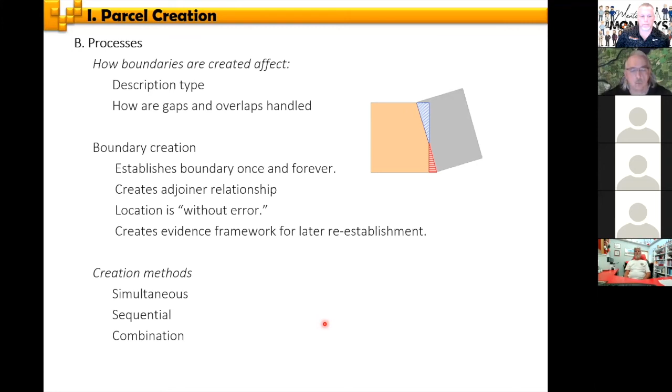Okay. Page down. The simultaneous conveyance is when the boundaries are all created at the same time by the same legal instrument. And all the boundaries that are created have equal standing with respect to each other. There's no junior and senior rights. An example of this, for those of you in public land survey states, is the creation of sections. When a township plat is recorded, accepted for recording, at that point 36 sections, or however many are within that township, are created at once, and they're all equal standing with respect to each other.

When a section is quartered, those quarters are created simultaneously by connecting opposite quarter corners. That's a simultaneous conveyance, and so on and so forth. So aliquot parts are all simultaneously created. In most states, subdivision requirements require that when the map is accepted, at that time it has to be surveyed and all the monuments have to be placed. So when it's recorded or accepted for recording, at that point all those parcels are created at the same time and are in equal standing with respect to each other.

And that's generally a lot and block type of description. So lot number 1, the Sweetwater addition. So you can see that in a simultaneous conveyance, there are no junior and senior rights between the children that are created, and the description is typically a lot and block or an aliquot part. Okay, so to a certain extent, when you look at a description, it kind of implies a type of conveyance. So if I say I've got the northeast quarter of section 16, that implies a simultaneous creation of that quarter section. Okay.

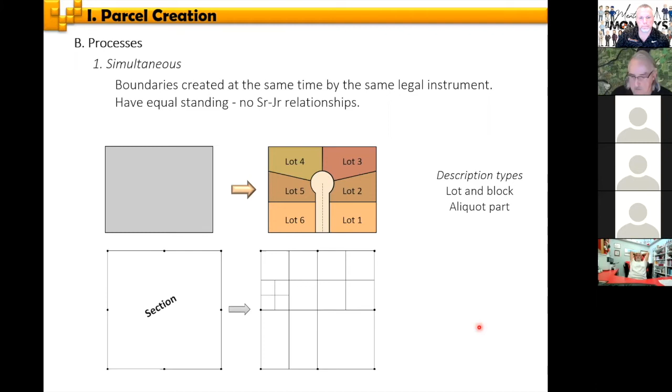Sequential is where parcels are created independently from the same parent over time. And the earlier created boundaries have higher precedence, or they're senior over later created ones. So if I've got my parent parcel here, and we create parcel 1 in 2008, then parcel 2 in 2010, and parcel 3 in 2015, there's a hierarchy or precedence of these boundaries. Parcel 1, because it's first, is senior to everything that follows it. Parcel 2 is junior to parcel 1, but it's senior to parcel 3. Okay. So we see that we've got that dependency of boundaries. So there are junior and senior rights in there.

And the typical types of descriptions that we have for sequentially created parcels are a metes description, or a bounds description, or a metes and bounds description. The difference between the two is metes means by measure. So we generally give directions and distances. Bounds means by limits, like we call for adjoiners or call for a river or call for a road. Metes and bounds combines those two together.

That's what most people are familiar with. So again, if you see a metes and bounds description, that implies that that parcel was sequentially created. Now that's not 100% true all the time, but it's the initial implication. You won't know unless you do a title search.

The last one is a combination conveyance. It's called a combination conveyance because it's a combination of sequential and simultaneous. And generally what it is, is a sequential creation of a simultaneously created parcel. So the boundaries can have characteristics of either or both. There may or may not be junior and senior rights.

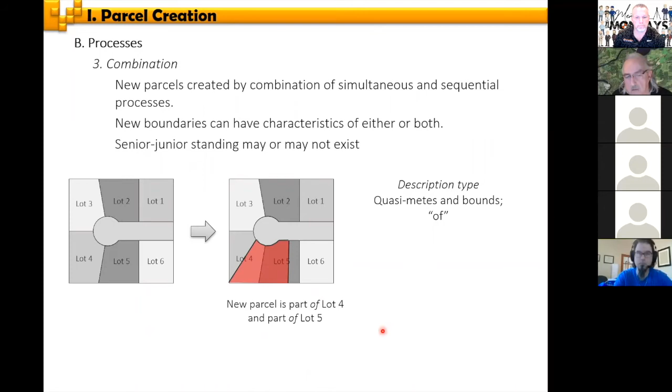Now, it's not strict. They're guidelines. They're developed from common law. So again, things can change. The description wording, and we'll see how just a change in nuance of how the words appear in the description can alter the way we evaluate the evidence as far as conflicting evidence is concerned.

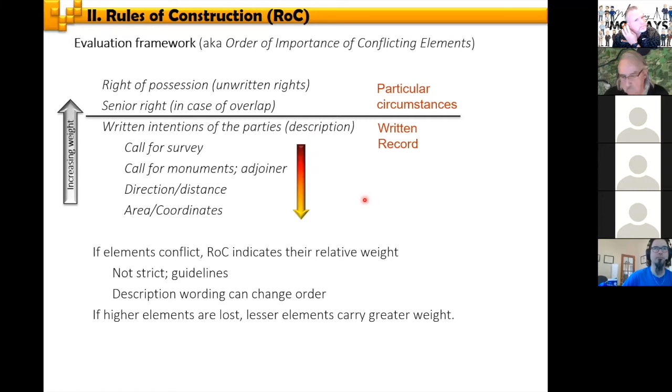And there are a couple of different doctrines that unwritten rights can mature under. One is adverse possession. The others are prescription, oral agreement, equitable estoppel, and recognition and acquiescence. And I believe Knud Hermansen is going to be doing 2 presentations a little bit later, one on adverse possession and the other on prescription, which is a special kind of adverse possession. That is correct. But ultimately what happens is the ownership is determined by the courts. The surveyor doesn't have the authority to determine if somebody has gained ownership by unwritten means.

So for instance, in this case here, where this fence is encroaching on this owner here, and this person is using continuously up to this one here, it has to meet particular requirements and that type of thing. He in fact may have ownership rights to here, but the surveyor doesn't make that determination. The court makes that determination. The surveyor at best shows where is the deed line and where's the possession line. And the court may use that possession line or that use line to determine what is the extent of that unwritten right.

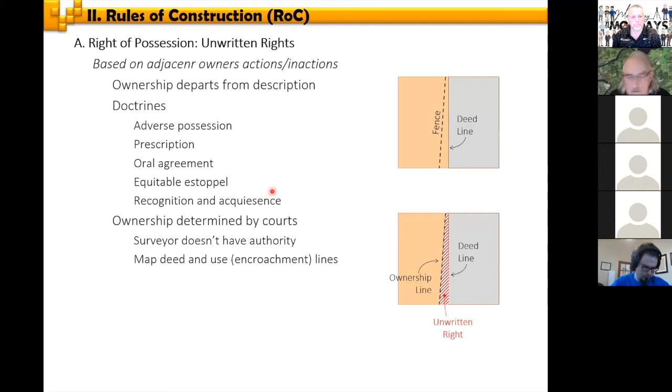Senior right in case of a gap or overlap. Now, remember, the precedence is established when the boundaries are created. So once a boundary is created, the junior and senior right is established and doesn't change until the boundary is legally removed. You got to remember that the junior and senior relationship is a boundary attribute. It's not an owner attribute.

If somebody is the senior owner of a parcel and then sells that to another person, that second person then becomes a senior owner again, because that senior junior relationship sticks with the land. It doesn't go with the owner. So you got to think again in terms of what is the precedence of the boundaries with respect to each other. Remember that the child inherits the parent's junior and senior standing along shared boundaries.

And so right here, I've got a relationship that's inherited from the parent. And here, the junior and senior relationship is established based on when these 2 parcels are created with respect to each other. And the other thing to remember is because the parent has to provide for the child, the parent is junior to both of the children. So whatever's left over of the parent parcel is junior to these individual children that are created off of it.

So whenever you have 2 or more children that are adjoining created from the same common parent, you've got a potential for a gap or overlap. And the resolution depends on how the parcels are created. If it's simultaneously created, remember the individual created boundaries within a simultaneously created situation like a subdivision, there are no junior and senior rights associated with it.

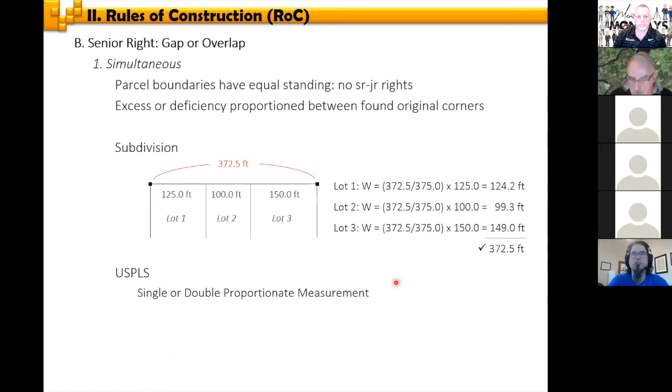So again, depending on the hierarchy of the lines as they intersect in a public land survey system, you're going to be using single or double proportionate measurement, which is basically doing the same thing here as we're doing here. In a sequentially created one, things can get pretty interesting. Earlier created boundaries have higher standing than later boundaries, so they get precedence.

So again, if this child is created off the parent, the child parcel A is senior to the remainder of the parent. Later on, when parcel B is created, it's junior to parcel A, but senior to the remainder of the parent. And when the final part goes off, this is the most junior parcel. This is the most senior parcel, and this is the one that's intermediate.

Now, if we take that relationship that we have, and then we create another parcel here, parcel D, off of A, which makes this the remainder of A. This is the parent now for this child, and it shares boundaries with that parent.

It inherits the junior and senior relationship with it. So even though it was created 7 years after this one, it is senior to the 2010 parcel, okay? And this is one of those cases where if you see a metes and bounds description that calls for a parcel or calls for an adjoiner, does that mean that that adjoiner is automatically senior to the instant parcel, because it had to exist before the description was written? No, and this is a situation where that happens.

This may call for parcel B in the description, but parcel B is junior to parcel A, so parcel A's boundary would limit where parcel B is, and because parcel D shares parcel A's boundary, it's senior to it. See that? How do you find that out? How do you know that this is in fact senior to this one, even though it's 7 years newer? What do you have to do? That's where you jump in, audience participation. What do you have to do?

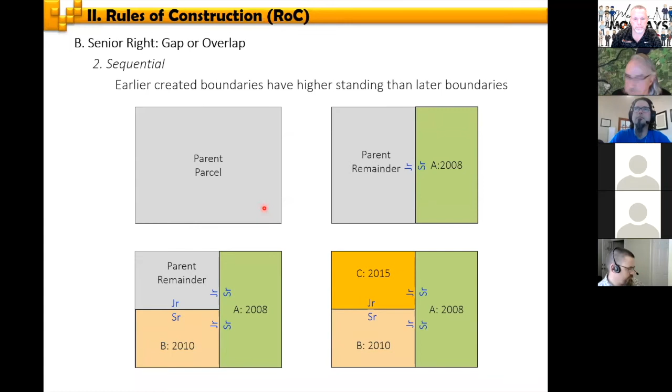Now, why go all the way back to the parent? Because the parent has potentially got a junior and senior relationship along the southern boundary here with the adjoiner to the south. Okay, so if that's the case, this guy here has got that same junior and senior relationship with respect to the parcel to the south. So you've got to go back far enough to establish when these boundaries were created in order to understand what the junior and senior relationships were.

Again, there was a typo down here. It's this parcel D is senior by inheritance. I originally had parcel B in there, which is a mistake. So be sure you correct that.

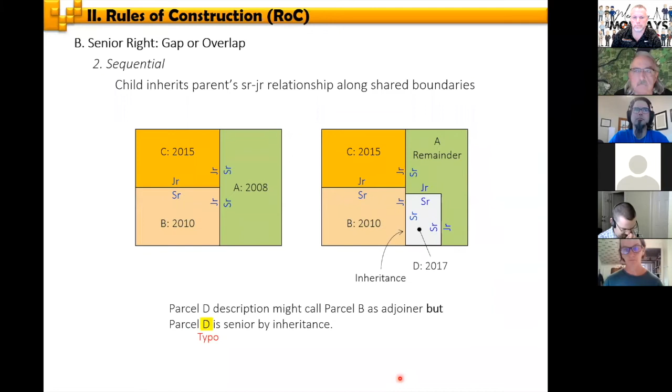All right, along junior senior boundaries, what happens is the senior parcel is protected in the case of an overlap. The junior parcel yields. It can't get what is allocated to the senior parcel. If there's an excess, a gap is created. And this is one that people tend to get tripped up on. The gap is a parent remainder. The tendency is to say, well, if there's a little bit left over, we'll give it to the senior parcel because there is a senior parcel. Or we'll split it between the two.

No. What happens is a gap is created that was never conveyed. So in this case here, if I've got a gap here, you don't automatically give that to the senior owner or to the junior owner. It is still a remainder of the parent parcel. Now the court may decide, well, we'll give that to the senior owner, or the court may decide we'll split that between the two. But that's a judicial decision based on a defect in the title.

What we're bound to do is to define the deed lines where they fall. And we might say, well, look, the original owner didn't intend to create a sliver there like that, so they evidently intended to divest himself of all that property. Well, we have a case in Wisconsin, and I'm sure there are similar cases in a lot of states. The question is not what reasonable men intended to convey, but what they in fact described in the contract or the memorandum. So whatever they said they were conveying, that's what was actually conveyed, as long as it doesn't infringe on a senior right.

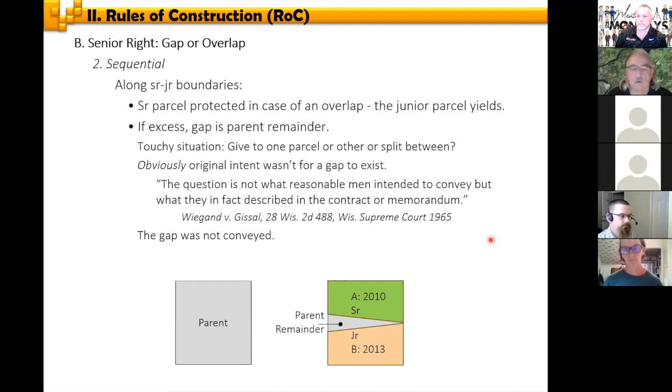So a gap is created, and that's the remainder of the parent. Now, if that happened 30 years ago, chances are one or the other has been using it and has gotten it by adverse possession or some other means like that. Again, that's not the surveyor's purview to decide. That's a court decision. Okay. So our job is to be sure that we identify where those deed lines are.

Now, combination conveyance. In a combination conveyance, I'm getting all tongue-tied here, the parcel boundaries may or may not have junior and senior relationships, okay? So an example, we start with our 3 lots in the subdivision here. And we create over time, sequentially, the west 100 feet of lot 12, and then later the east 100 feet of lot 12.

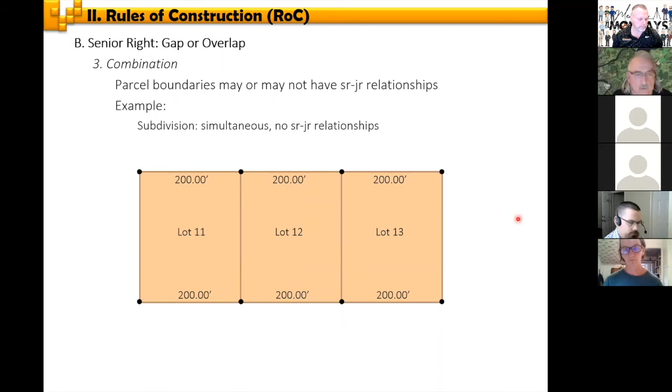Remember, the record dimension here is 200 feet on the north and 200 feet on the south. So the presumption is there's 200 feet to work with there on both sides. So when that is created, this is the parcel. This blue and this green together is that parcel that's created. Along this line here and this line here, there are no junior and senior rights because they inherit those from the original lot number 12. That's the parent parcel.

Here, however, we do have a junior and senior right situation because this is created first. It is senior to this one that's created here. Pretty straightforward. Well, let's say that on a resurvey, there's 198 feet between these 2 found monuments here and 202 feet down here. Make them drastically big so we can see the numbers.

What happens is along the north line, because this is the senior owner, this one gets the 100 feet that they're given because they're senior. And the junior owner has to yield and they only get 98 feet. Along the south, the senior owner gets his 100 feet. The junior owner gets her 100 feet, and there's a 2-foot remainder in between. So we've got this little sliver that was never conveyed.

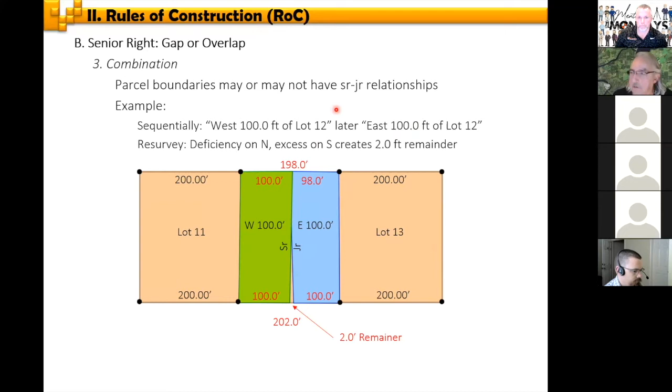Now, how can we avoid that? Well, one way that we can avoid that is to not do this kind of stuff. But another way to avoid it is, instead of using calls from 2 directions, whenever you use calls from both directions and you're giving specified dimensions or areas, you run the potential of having a conflict later on if the dimensions don't match what the presumption is. One way to do it is to use a description by exception.

So in this case here, we changed the wording a little bit. We make it the west 100 feet of lot 12. That's the same as it was before. But then for the other one, we convey lot 12 except the west 100 feet. Got that? So we just changed it a little bit. Instead of saying the east 100 feet, we'll say, well, it's what's left over of lot 12 after the west 100 feet is gone.

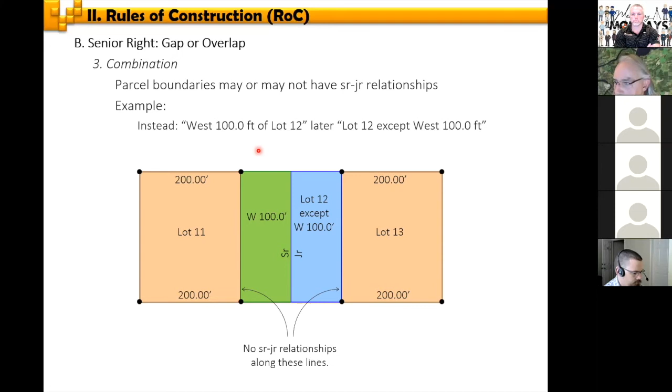Once you do that, then on a resurvey, this still has got the 98 feet here because the 100 feet is given here. But down here now, that 2-foot gap isn't created. The 2 feet goes onto this one because after we mark off the 100 feet for the senior owner, whatever's left over goes to the junior owner. And that way there's no creation of a gap in that situation. So just by changing the wording a little bit in a description, it can drastically change how we interpret who gets what in a junior senior right situation.

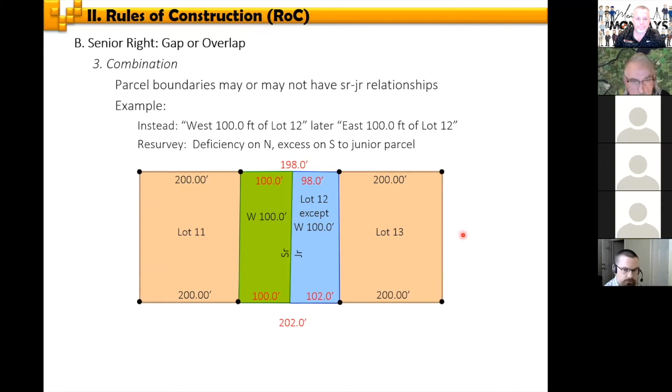Okay, whoops. Wrong one. Okay. All right.

So we looked at unwritten rights and we looked at senior right in the case of an overlap for the most part. And then we kind of dropped down to the one that's below there, that's written intent. So when we talk about written intent, we had call for survey, call for monuments, and all that kind of stuff in there. Why is that even in there?

Well, the reason that's in there is because of the statute of frauds, which goes all the way back to 17th century England. And it's a law that said basically contracts had to be in writing in order to be valid and enforceable. And every state pretty much has some form of the statute of frauds in contract law. And it will tell you in your statutes what elements are necessary to be present for a contract. Sort of like it has to identify what's being conveyed from one party to another, that there's good and valuable consideration.

You ever see a deed that's got on it for $1 and other good and valuable consideration? Those are legal terms to show that there was something that was exchanged for the property. Otherwise, it's a gift. And if it's a gift, that's different than a deed or a contract type of thing.

But the reason that we had the contracts written that way is that all the terms for the transaction between the parties are included in that document, so that later on, it prevents either party, either by word or by action, contradicting what was actually conveyed between them. And also, it provides interested third parties the opportunity to look at that contract and understand what was the transaction between the two parties, particularly if they're going to be a third party to that transaction.

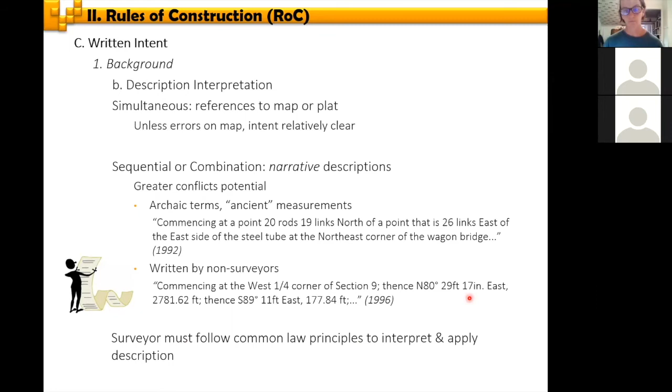So we get this concept of controlling and informative terms. Because when we talk about the rules of construction and the implied order of importance, how we word it can have an effect on whether we have to flip those orders around. But a controlling term is something that determines a course termination and or its path, and basically identifies a condition or multiple conditions. And we look for keywords like to, along, parallel, perpendicular, with, continuing. They imply something specific.

An informative term is everything else in a course description that helps to identify that controlling term. If we say north 38 degrees west, 139.6 feet to an iron stake, we see the word to in there. The intent was to go to an iron stake. As a matter of fact, iron is informative. It's to a stake that's iron, that's at this bearing and at this distance. So this is the controlling term in here. So we look for that.

If we've got then southwesterly along said high water mark to an iron stake, we have two controlling terms in there: where the line ends, the iron stake, and how the course goes when it goes to that iron stake. It goes along the high water mark. It's called for a topographical feature. So it's not in a straight line. It's along whatever that adjoiner is that's called. So those are controlling terms and informative terms.

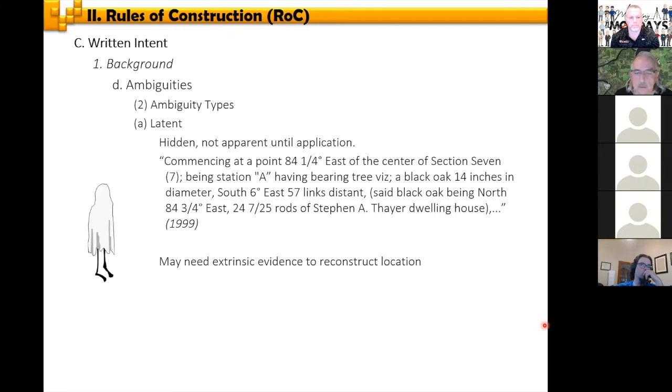It's confusion. A patent ambiguity is obvious. It's immediately apparent. In that example I gave before of the feet and inches in the bearing, it's apparent what the error is. So it's a mistake in the original contract, and the mistake must be found and applied where it occurred. And in most cases, in most jurisdictions in Wisconsin, we can file something that's called a correction instrument. A correction instrument can be used for a lot of things, but in the context of the deed, we identify the deed and we identify the error in the deed and we put that correction in there and we record it.

When you do that, that correction instrument becomes part of the chain of title. So if the next person is investigating this property and they encounter this description, there's a correction instrument on file that shows what the error was and how it was applied. So again, depending on the jurisdiction, you may or may not have that type of document, or it might be called something else. But when you identify that error, you want to include it as part of the chain of title. But we don't change the bearing to what they meant for a bearing. No, we only find that error that's in there and apply that error where it occurred. Now, in written intent, after taking all that into account, as we step through all those different levels of written intent, the very top one we have is call for survey.

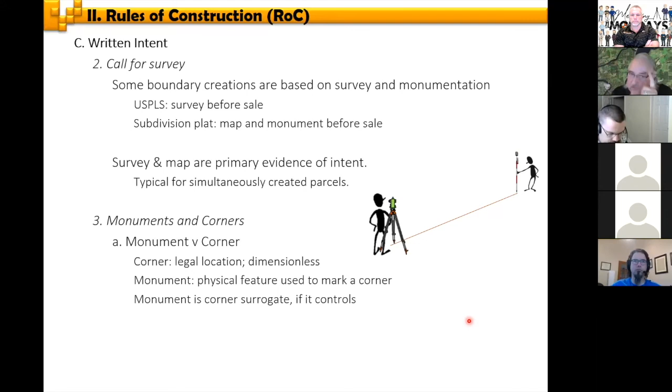We like monuments because that's what we can set up over with our total stations or GPS receivers or whatever. What we want to know is not necessarily where the monument is, but where the corner is. If the monument can be proven to be there because of the corner, then we use the monument as a surrogate for the corner. And another thing is, just because we find a monument doesn't mean that monument necessarily has authority. And it goes back to the description again.

Okay, if we find a monument, but it's laying on its side over here, that's a disturbed monument. We can't use that to give it authority. Now, what about replacement monuments? Well, a lot of original monuments in the public land survey system were wooden posts. They no longer exist. They've been replaced over time with stone, concrete, aluminum, metal posts, and that type of thing. So we have replacement monuments.

Well, in order to accept a replacement monument, in order for it to have authority, there has to be some documentation that shows that this monument actually is a replacement for the corner that was there. So if it calls for a 4-inch wooden post, but we come out there and we find a 1.5-inch iron pipe, is that iron pipe connected to that post location? If we can't find a connection between those two, then it's not called for. We don't have it directly connected to that original monument.

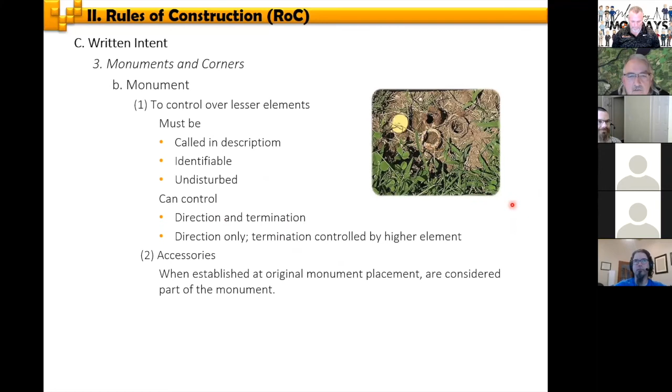How many of you have ever run into monument nests or pin cushions like this? Okay. To me, this is a surveyor's equivalent of a dog peeing on a tree, saying that this is my location right here because it's that much better than this guy's right over here. So a lot of interesting stories behind those types of things, I'm sure.

Now, the monument disposition is this location certainty. And we use the BLM, the Public Land Survey definition for existent, obliterated and lost corners. And that pretty much fits most of the situations we deal with in land surveying in general, boundary surveying in general. An existent or found corner is a position that can be identified by the original monument or its accessories or acceptable physical and parol evidence. We're pretty certain about the location. We can point at that spot and say, I'm pretty sure that's the original corner location based on the evidence that's available. Obviously, if I have the original monument there, that's the best. But if I've got other things like a replacement monument that's connected to the original monument, I can point at that and say, I'm pretty sure that's an existent or found corner.

And obliterated means there's no traces of the original monumentation or the accessories, but the position can be established beyond reasonable doubt using physical and parol evidence. Again, this is stuff that happened after the monument was set or after the corner was set and reflects actions or evidence that are based on that corner location. Things like fence lines and roads and that type of thing. They may not intersect at a real nice distinct point, but we can be pretty sure they're generally in this area right here. Within reasonable doubt, it's located in this area here.

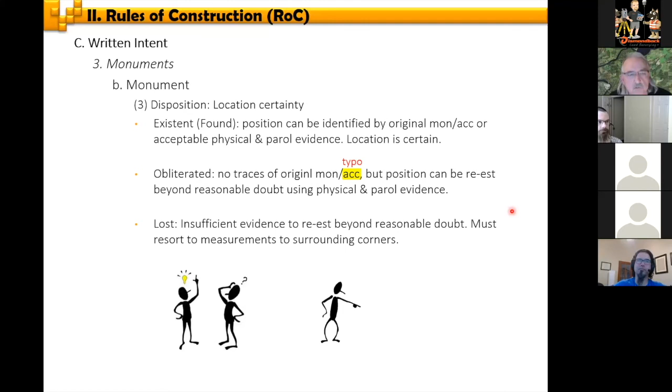A lost corner is, there's not enough evidence to establish it by found or obliterated methods, or the evidence is so weak or so contradictory that we can't really say, well, this is where I think it is. Because if I look at it this way, it might be over here. If I look at it this way, it might be over there. It's just weak. It's too contradictory. In a case like that, you have to resort to measurements surrounding the corners. We may have to go back and use things like proportionate measurement to reestablish the lost corner in that particular case. So those are the dispositions. That's the character of the corner that we're looking for.

Now, we'll see sometimes people saying that we accept the corner by common report. And anytime you see the word common, common law what? Common law property. That has to deal with court decisions and tribunal decisions, which means that those are going to vary from jurisdiction to jurisdiction. But basically, by common report, the justification is that I can't find a whole lot of stuff, but the corner that everybody's been using, like this corner post here on the fence, it's in a reasonable location with respect to the corner that we're looking for.

All the people around it accept it as their corner. They've just been using it. They've acquiesced in that position. And I really can't disprove that location. I can't come up with better evidence that says there's a better location for this corner. So I'll accept it by common report, okay? You shouldn't do that because common report means that there's some unwritten rights happening here. If you look at reasonable location accepted by all affected parties, that's just like adverse possession.

It's how people are acting with respect to a boundary. And because that's the way they act, that's an unwritten right. That's not necessarily something that you can point at and say, I know beyond reasonable doubt that that's the corner location. You want to be able to accept or reject a corner location based on the evidence that's collected. So you might use parol evidence in the case of these people here, or parol evidence of people in that area that may have information about that, or other survey records that may tie to that point.

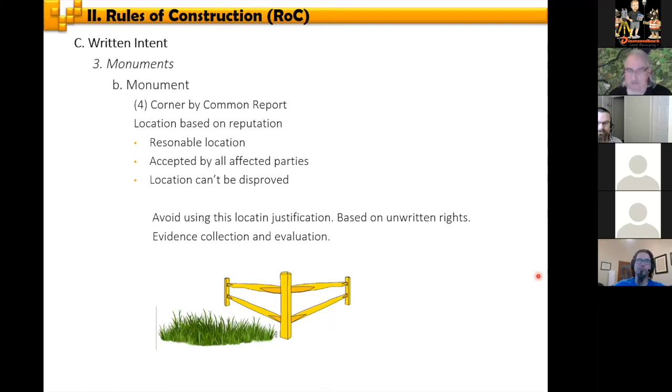So that's what they would do. They would beat the crap out of a kid. And then 60 years later, when he was a senior citizen, you could take him around. If he started shaking when he got near a corner, you knew that was the spot right there. So it may be something we should consider bringing back into this country, beating the bounds. They still do that in England, but only strictly as a showmanship thing. They don't actually beat anybody. But it's one of the things to consider.

Distance and direction. Below the monuments. Oh, was that a question? Distance and direction is the next element. It's inferior to a controlling monument, but they can control if the monuments are not called. There is no call for a monument. Or if there is a monument that's called, but it's lost, we have to resort to using distance and direction to locate that corner. Now, the problem with this is a direction basis has to be recreated in the field.

What did they use for direction? When I taught writing legal descriptions in my classes, I always stressed that in the summation, always include what the basis was for the direction. Directions are all based on the east line of said quarter section, which is assumed to bear due north. That way we knew what the basis was, or based on the Dane County coordinate grid system. In most descriptions, you don't see that in there. On plats, on certified survey maps, minor subdivision maps, and that type of thing.

Even on the old USPLS township maps, you saw a basis for direction. They would show where true north was and where magnetic north was and what the declination was for the center of the plat and that type of thing. But if it's not shown, how do you recreate it in the field? Well, obviously the best way to do it is find two adjacent original corners and use that as a basis to start with, but it's tough.

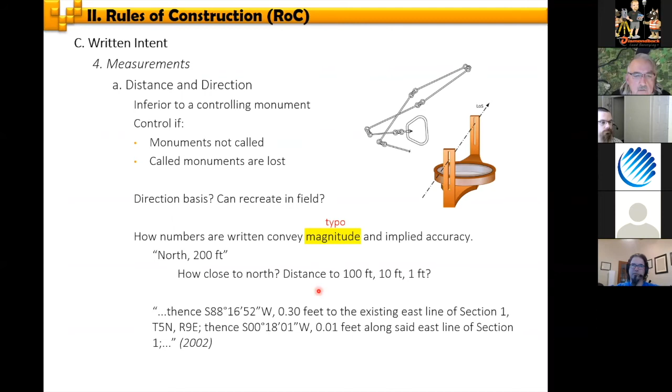So just because we have more modern technology today doesn't necessarily mean we have better expression of directions and distances. I've seen a lot of maps and plats submitted to the map and plat competition that we have at WSLS every year, where the bearings are given to 1/10 of a second and distances are given to 1,000th of a foot. Those aren't realistic, okay? We go off the deep end in the other direction. So we gotta be careful, not only just interpreting stuff, but also when we write things.

Another thing that comes into play are called general directions. A general direction is not an explicit direction like a bearing is. A general direction is a range of directions, and there's basically 8 of them. There's 4 in the cardinal directions, and then there's 4 in between those. And they end with -erly. So there's like northerly, southeasterly, northwesterly. And they cover about a 45-degree range. We use them primarily as informative terms.

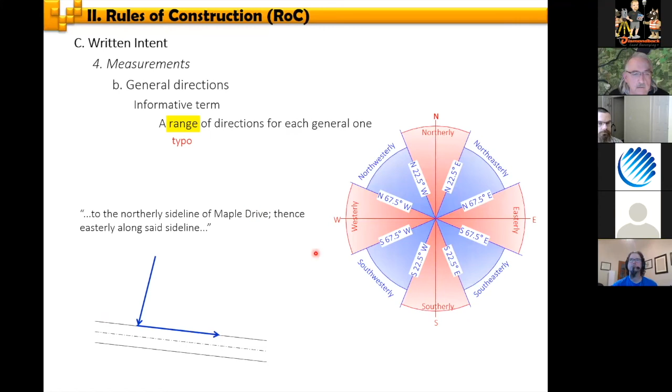So we could have a distance and direction to the northerly line of Maple Drive, as opposed to the center line. Thence easterly along said sideline, as opposed to westerly along it. It's an informative term that helps us interpret the controlling terms of the description. They should never be used by themselves. Okay, thence southeasterly to Mahun River. That's a 45-degree range that you could be within. That's too generic.

All right, what constitutes a conflict? We talk about monuments, distance, direction, all this kind of stuff. What constitutes a conflict? Sometimes that's not that easy to figure out. Say the last 2 courses of a description say thence south 18 degrees 20 minutes west, 283.2 feet to a 1/2-inch iron pin, thence 220 feet back to the point of beginning. So we've got the 3rd course and then the 4th course back to the point of beginning. All the corners have been recovered except the last one before the point of beginning.

So we got this corner up in here. Now we're trying to figure out how do we get down to this one and to the point of beginning. So at the bearing and the distance, there's no monument, okay? There's just that location. We do have an iron pin, but it's at a different bearing and a different distance. And these 2 are about 3 feet apart. The distance from here to the point of beginning is about 220 feet. The distance from here to the point of beginning is about 224.52 feet.

So the question is do we have conflicts in here? And if we had to make a decision without any extrinsic evidence, which is the one that we would probably select as a corner location? Now, if we look at point B, are the distance and direction of point B too far from the record direction and distance? Is it far enough away that we might be able to say, well, B doesn't appear to fit the other 2 elements very well? If it was just a little bit out, what constitutes a little bit, we would accept B as the controlling corner. But is it too far out in that respect?

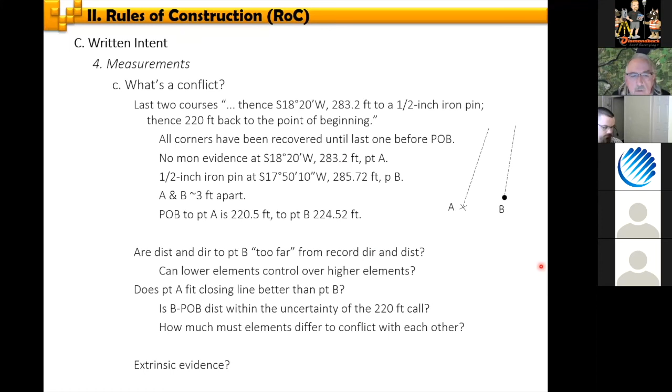In a case like this, and this is again purely made up, there is really insufficient information to make a decision here on this. You have to resort to extrinsic evidence. Is there other physical or parol evidence that we can use to try to resolve which of these two corners is probably the corner that we would use before we go back to the point of beginning? Because you can make an argument either way in this case.

All right, area is one of the lowest elements. Whenever we have an area call in the metes and bounds description, this is generally an informative call. But whenever we have like the public land survey township plat that was recorded, and this is section 6 in a township plat in Wisconsin here, they identify the area, the fractional quarters, the government lots. It shows what the total section area is, and of all the interior sections, it'll show those are 640 acres.

Now, are those interior sections exactly 640 acres? No, the intent is if it was perfect 1 mile square and there wasn't any convergence and no survey errors, then yeah, we'd enclose 640 acres. Those are considered nominal. That's what they used to sell the land by, but it's understood that there might be more or less area within there. So when we have the area that's shown on a township plat, it's understood that may or may not be true. Those are informative, okay?

In subdivision laws, we generally require that the area be included on the map also. Those are also treated as informative terms. They don't dictate, because we have bearings and distances and calls for monuments on the plat. However, when you get into metes and bounds descriptions, the area is generally in the summation at the end, so you describe the parcel going all the way around. Then you say said parcel containing 1.5 acres, and then you say more or less, just to be on the safe side. But it's an informative term.

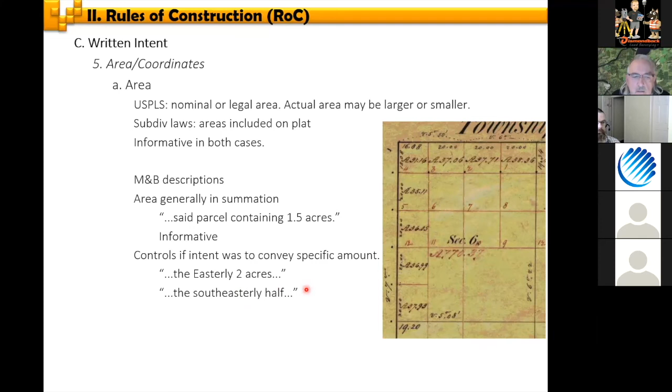That's again to mimic the child and the parent relationship and that type of thing. You can also have it in terms of a proportion, the southeasterly half. So whatever the parent contains, this would be half in the southeasterly corner of that parent. So again, the quantity becomes a controlling term in that context.

How about coordinates? Well, coordinates haven't been used too much in descriptions for a variety of reasons. Most places will have state plane coordinate systems defined for them, but those numbers are huge. And we generally don't put huge numbers like that in a description. It takes too much. So we normally don't use descriptions by coordinates. But if they were included, they were generally viewed as informative.

As a matter of fact, in Wisconsin, our subdivision law says that when coordinates appear on a subdivision plat, they have to be either state plane coordinates or county coordinates. We have county coordinate systems in the state, and they will be inferior to all the other elements on that subdivision plat. So basically they're saying right off the bat, it's codified, coordinates are at the bottom of the list, okay? But now we're starting to see descriptions like this appear. This is recorded in 2005, and I'm sure there's a lot more since then.

Thence northerly 487 feet more or less to GPS waypoint latitude 43.828655, longitude minus 90.661033. Thence northwesterly. You see that it keeps giving a distance with a more or less on it, which means that's approximate. That's an informative term. And the controlling term in each one is GPS waypoint. And that GPS waypoint is defined as this latitude and this longitude. No call for monuments, no directions. The distances are approximate. This is your description, okay?

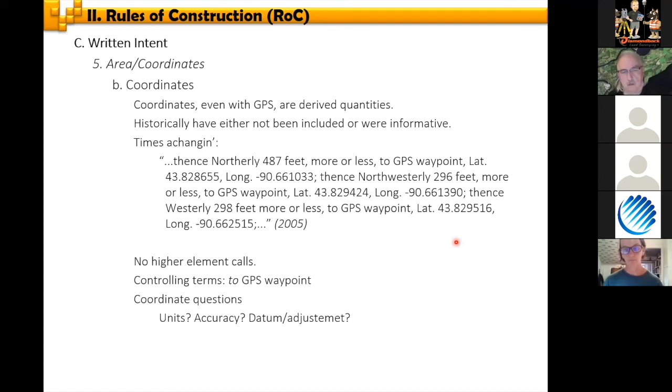But we are starting to see it happen. So if this happens, then coordinates suddenly become your most important element because they go up to the top of the list. Okay. All right, more or less is one of those phrases that gets tossed around a lot.

We generally see it applied in the summation of metes and bounds description when we give an area and just to be on the safe side, toss in more or less. Other words: approximately, plus or minus, the plus or minus sign, about. Those put the reader on notice that in fact, that term is uncertain. There's a certain amount of uncertainty to it, and that can't be a controlling term. Okay.

That's uncertain. So if you think that's about 28 rods plus or minus a rod, that's plus or minus 16 feet. That's quite a range. So again, in that context, that's not used correctly. Okay? You need extrinsic evidence to resolve those types of things.

One of my favorite things I used to do when I was going to school in Madison, and somebody would stop and ask me for directions, and they were confused and they were in a hurry, I'd always say, go to the last stop sign and hang a left. And they generally drive a couple blocks before they think to themselves, well, how do I know I'm at the last stop sign? It's basically the same kind of thing. You give them an informative term, it's a stop sign. You just don't tell them which one.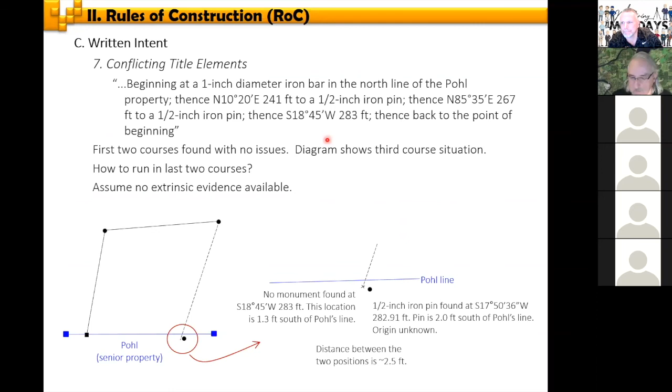Okay. All right, on this one here, let me go through a short answer. Proceed at the record direction to Pohl's line and stop. The monument is not called for, so it can't control. Neither can a 283-foot distance, since that would violate Pohl's senior right.

Now, you don't stop there. What you want to do is you want to look at every realistic solution that may exist and then toss them out based on some reasoning or evidence and that type of thing. So, this thing about going to the monument, not to Pohl's line, that's one alternative, but we can't do that because the monument's not called for.

Okay. We go to that bearing and distance and then back to the point of beginning? No, we don't go to the bearing and distance back to the point of beginning because we violate Pohl's property. So again, you want to look at all the alternatives. And when you accept something, accept it because it fits the evidence or the intent as best as possible.

May not make you the happiest, but it's the best solution based on the available evidence and that type of thing. Because the last thing you want to have happen is the attorney that asks you, did you consider the fact that this monument is not called for in a description, so therefore it can't control? No, I accepted it because it's like all the others. Or worse yet, I accepted it by common report.

So again, you want to look at all the alternatives and throw away the ones that don't make sense, or don't fit the evidence and that type of thing. All right.

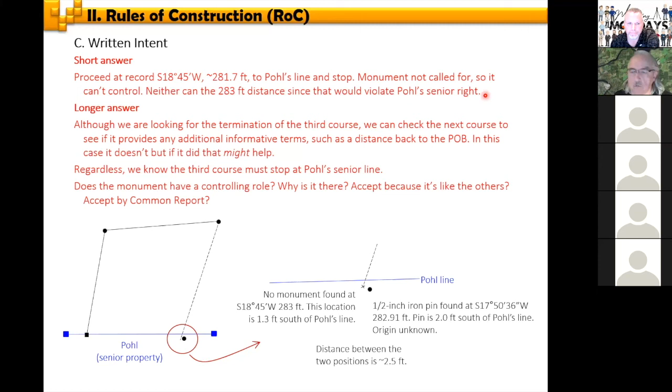There's a couple of things in the chat that kind of go along with this conversation we're having right now. Yeah. Trevor talked about, where'd it go? It was up here. What if the title employee wrote the description and left out the monument on that line? And kind of all in those same theories, like scrivener's errors. How do you determine what a scrivener's error is? And that the deed is exactly the same, and that kind of stuff. That's where you got to do the title search.

In Wisconsin, when we do a resurvey, our minimum standards say that you will perform a survey to reconstruct the lines as best possible according to the records of the Register of Deeds. So that means when I have this piece right here, and I look at it, that monument bothers me. Maybe if I go back a description, maybe when somebody rewrote the description, there was a call for that monument in there, but whoever wrote it dropped it out.

If that's the case, that's an error that I can identify, and I can file a correction instrument to bring that monument back in. But I got to be able to prove some way that there was an error that was made on it. And if it was a scrivener's error, I identify that, but I have to do that title search. Okay, that's that.

You got to go back far enough to establish the stability of those lines. Did I answer that question? Yeah, I think so. That's perfect. You can go down that rabbit hole even farther, right? So at that point, the monument holds for line only and still stops at the Pohl line. And again, the court, depending on how good an attorney you have versus the attorney that they have, and the follow-up questions and stuff, that can have a big effect. You have to educate your attorney on this.

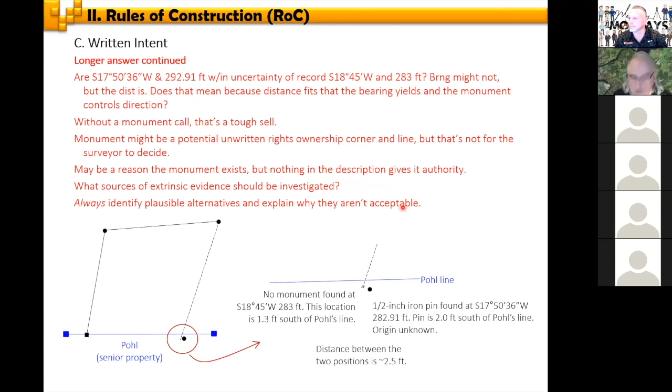Okay, let me go real quick through the learning objectives. We went through all this stuff relatively quickly, and we didn't go into a lot of depth on some of it. And anytime you start discussing legal issues, as we saw with this last problem, if you say, well, what if this, that can change things dramatically. But it's those kind of questions you have to ask yourself when you're doing a boundary resurvey. It bothers me if that monument is there. Somebody put that there. It's there for a reason. The question is, is it a reason that has an effect on the decision I'm going to make here? But you don't know that until you do the research.

Okay, there aren't any questions. The assignment, y'all did the assignment, right? Now everybody's real quiet, right? That's right. I was out in the field today doing this stuff all day. That's because I said it wasn't going to be graded. Maybe if I had said it was going to be graded, they would have got more turnout, or people wouldn't have shown up for the presentation tonight.

Statute of frauds requires that a contract be in writing. We'll go through this real quick. Informative term is something that helps identify the controlling term in a course description. A corner accessory is any physical or natural feature that is measured to at the same time the monument is placed and becomes part of the monument.

Extrinsic evidence is evidence that's outside the document, but it does not change the terms of the document, only helps clarify it. An ambiguity is an uncertainty, a term that can be interpreted in multiple ways. Latent means it's hidden.